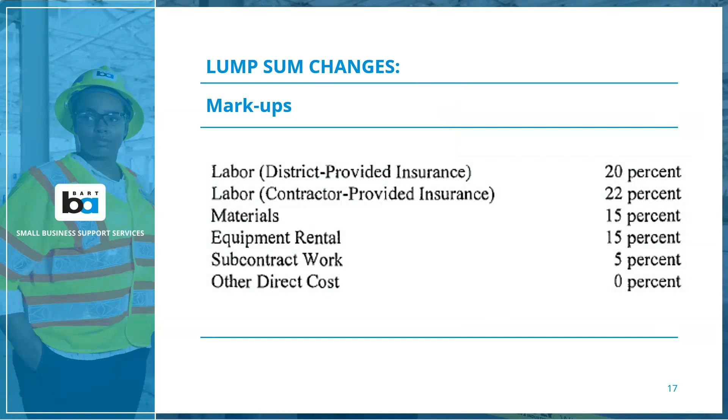And so basically, by doing these things, you're going to limit the amount of time you're spending trying to get something approved, and you're going to be able to focus the conversation on what actually matters and not on what format it's in and what markups are being applied. You can actually focus your negotiations on how many man hours you think this costs, what type of equipment, how many hours that equipment needs to be out there. Are your material costs right?

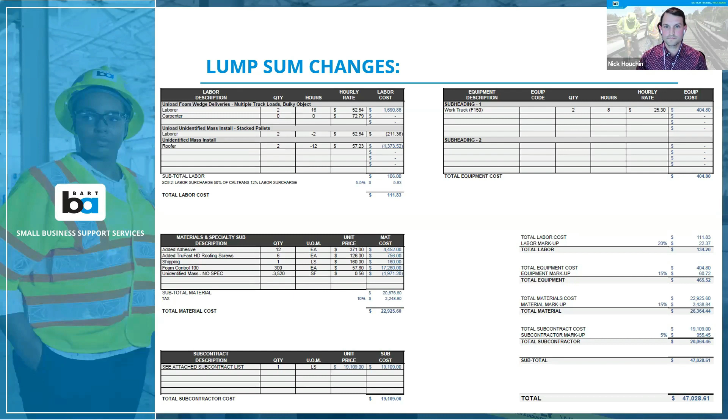So just moving on, we talked about the cost proposal process, but moving on to force account work. The critical item with force account work is that you have your force account sheets signed daily by both parties, by the contractor's rep on site and by the district's rep on site, which is typically an inspector. You have an agreement on the material that was used that day for that scope of work, the labor, the number of people that were out there, how many hours they spent on that scope, and the equipment hours that were used. And these sheets need to be filled out daily, and they need to be submitted daily to the district.

Really, the worst thing that happens is if these aren't filled out, 3 months goes by, and all of a sudden there's like, hey, I spent all this time and energy on this change, and then you're having to recreate force account sheets. And then as the district, you're having to review these days of work that happened months ago, and you're having to look at inspection reports to see if it even happened. And sometimes you're just going to get a flat rejection saying, we didn't have an agreement on these costs. We didn't know this was even a change at the time.

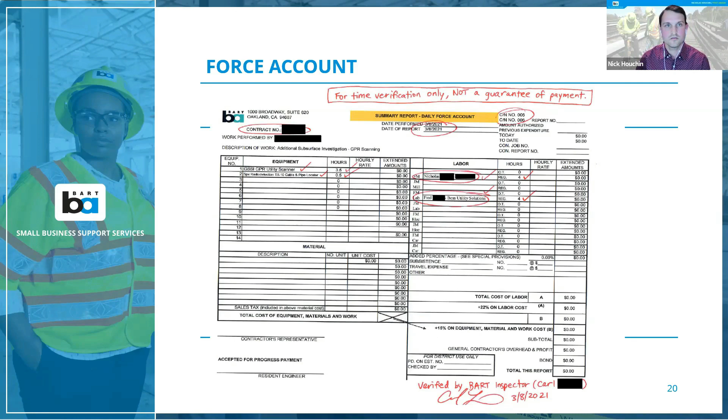So just to go over in summary, just to state first, this presentation is to try to give you where I see the biggest stumbling blocks when it comes to these items. But the SBSS program is here all the time. So if there's a question I haven't answered, or there's still something that you run into on your projects, please reach out to our group, and we'll provide that information later. We can answer those questions in that forum.

We can provide our services to help you through these processes, because every change notice and every change order is unique. And sometimes there's very specific challenges that pop up with those scopes of work that just don't really fall into a nice clean bucket. There's different types of issues you'll face that maybe I didn't talk about, but that we do have experience on and could help you through. So I just wanted to make that clear.

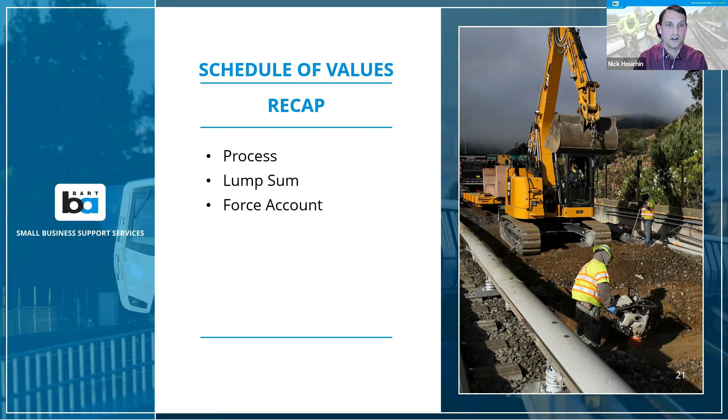But just to provide a recap, it's really important to document what's causing the change and to make it clear if you feel this is a change to your work or not, through RFI or serial letter or an email to the district. Be aware of design changes, differing site conditions, delays due to access. And then for lump sum cost proposals, the big thing is just documentation. Really try to provide detail.

We don't want to get in this process where you provide one big lump sum cost without detail, then it gets sent back. And then you submit something and the markups are incorrect and it gets sent back. And then you submit that, and there's no backup on the material costs, and it gets sent back. That's a terrible process for everyone involved. No one wants to get in that, and it's really frustrating, especially if you feel like you didn't know what they were looking for before you went into it. So if you can have that information ready on the front end, you're really going to skip those steps and be able to get into the negotiation part.

And then for force account work, it's really being on top of your T&M tags and making sure that everyone understands that change notice work is taking place that day and you need to track it. Because if you just let the work happen and you have to go back, it's going to be difficult for everyone.

Are there any other questions from anybody in regard to the change order process? I have a question. Can you guys hear me? Yes, I can hear you. This is Nolan. We're working with Lanting on the Richmond fence project for BART. So we're in the process of a change order right now. There was a design change to increase the sizes of the fence posts pretty early on, like a month after we received notice to proceed on the project. And ever since then, we've been down this process trying to negotiate a fair amount.

So we ended up submitting our cost proposal to BART. It was a lump sum, in the amount of 250,000 or so. It came back and ultimately they gave us a notice to proceed for $100,000 to start that work. But in this case, the $100,000 didn't even cover our material costs. So since then, we've issued a notice of potential claim. We're going down that process. But in that case, do you have any advice on how we would proceed when we're given $100K not to exceed when we can't even order material with that?

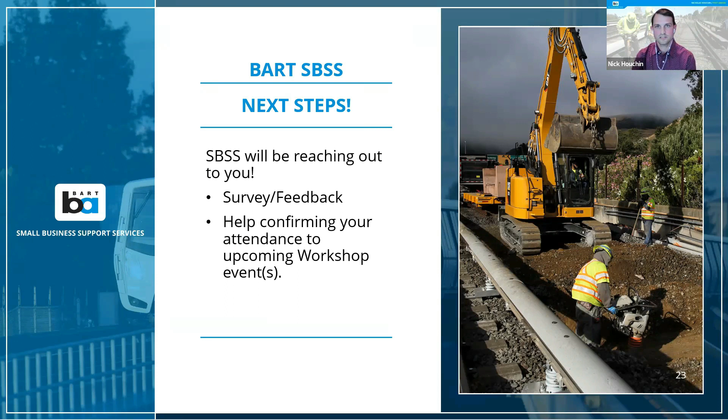If you can provide an argument in writing and try to get that pushed forward to the owner through the prime, then it may provide perspective that the owner doesn't know, or maybe the prime doesn't know, of challenges that are happening, and then they can work to resolve them. Because a lot of times things get stuck because of other issues that aren't related to the sub. That can happen sometimes.

Yeah, and that's hard. That's the hard thing: when we're on the owner side, if we don't know what the agreements are between the subs and the primes, we could be paying for things to the prime, but we don't know exactly how the agreements are between them in terms of what scope is what. So as the owner, I think the best thing you could do is, we have a big mobilization item in our contracts that's supposed to help pay for material and pay for costs on the front end. And then for the change orders, if we have all the right information, normally we can come to a quick agreement.

But if you're a sub also, OCR is another contact, the small business group is another contact. If you feel you're being impacted, you can use those vehicles to voice issues you're having on your projects if you feel like a prime is not listening to you. So those are other avenues to go through if you feel like you don't see any movement on something you've voiced your impacts on.